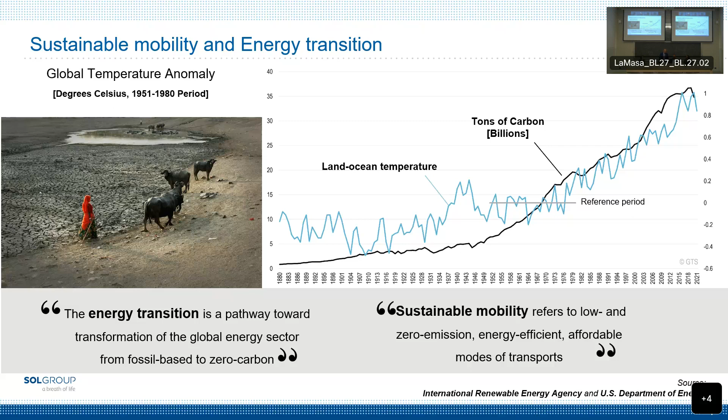So what happened? 50 years have passed, and the result is the one that you can see from this graph. The worldwide temperature is increasing, is rising up, CO2 emission as well, and we are here to talk about energy transition, so how to leave the fossil fuel, and we talk about sustainable mobility. So the question remains the same: can hydrogen help us in this transition? And we are still blocked at that point. No change practically.

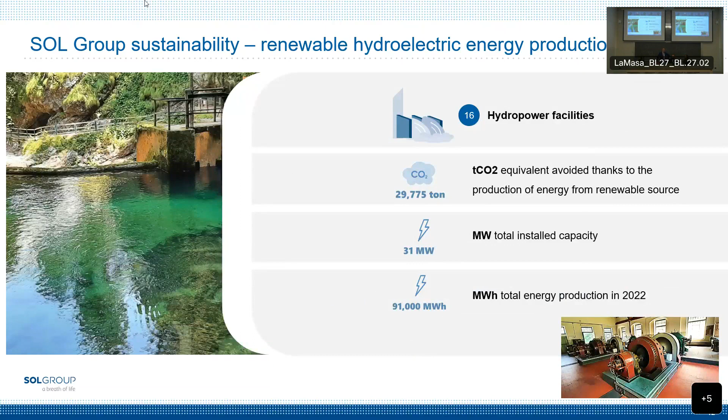What we have done in the years, as I told you, we work in renewable energy, we work for low carbon products and sustainable solutions for our customers. Our history about renewable energy began more than 20 years ago with hydropower plants. We decided to build up or renew very old hydropower plants to supply our production. Then the second step was photovoltaic, and in the last year, even wind farms, connecting again with our production, especially in India. And then we have the PPA, the power purchase agreement.

So we buy renewable energy in order to cover, each year, a higher and higher quota of our consumption. Then we work on biomethane, biogas and biomethane. We began a lot of years ago with plants in order to upgrade the biogas, and we are active in the market of bio-LNG. The bio-LNG is used mainly for trucks, so for heavy mobility, and of course hydrogen.

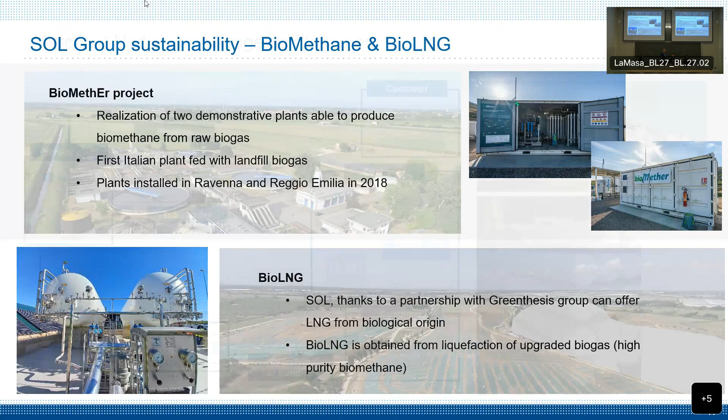What we are presenting here is called merchant. The hydrogen market is divided into two different parts. The main part is the captive, very large production that is used immediately by the consumer, like a refinery, the ammonia producer, and so on. The technical gas company does another job, the merchant, where we distribute the hydrogen.

This is the scheme of our production. There is a main production plant, a pipeline where we deliver hydrogen to the closest customers, and then we have a very developed logistics system to supply and bring the hydrogen to our customers by tube trailer or cylinder. Then there's a third way, called on-site, where we make plants able to produce hydrogen directly at the customer's facilities.

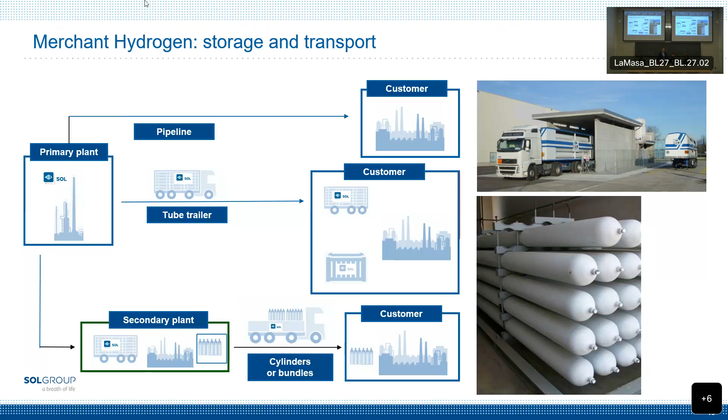Why are we interested in the future development of hydrogen? Because we can play a very important role. The large production will remain the large production - refinery, ammonia, and so on - but the new utilization of hydrogen will need specific logistics, and our companies are specialized in this field.

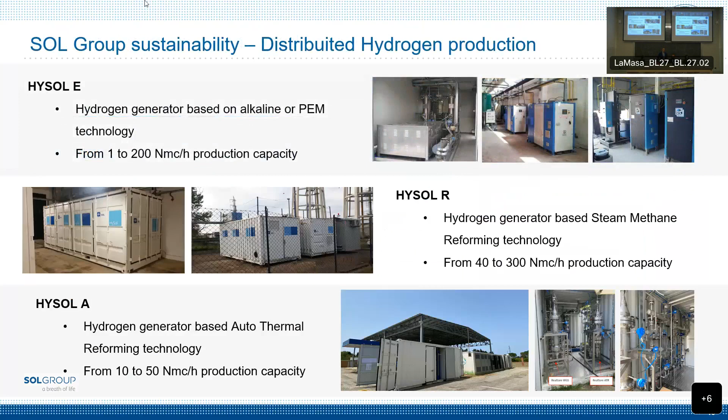Over the years, we have developed different technologies for production, as I told you. The on-site method has the advantage of producing hydrogen directly at the customer's location, and in that case we save all the CO2 emissions that we would have from transport, for example.

Over the years, we have always worked on hydrogen, to develop it as an alternative energy vector. In particular, we began to work on mobility since 2006, where we realized the first hydrogen fuel station. At that time it was 200 bar, and the engine of the vehicles used was completely different. Now today we talk about fuel cell cars, but in that case we were talking about combustion engines.

Then we developed the liquid refuel station in 2008, and in 2015 the upgrading of the fuel station to 350 bar. Now today we are talking about new projects for 700 bar.

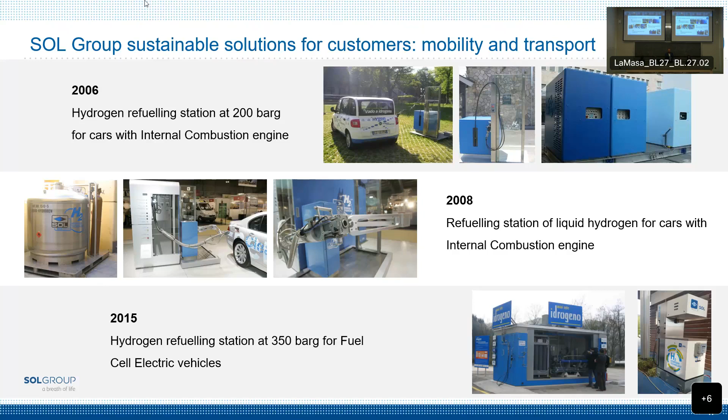Thank you, Alberto, and good evening to all of you. To try to go deeper in detail about the application of hydrogen in different sectors, I think we have to take a step back about CO2 emissions and greenhouse gas emissions.

With this slide, I just put some data that is not updated - it's from 2016, but it's still valid - through which we can understand what sectors are more impactful on CO2 emissions. Looking at this graph, we can see that industry plays a very important role, but also domestic, agriculture, and transportation have a big role in CO2 emissions and climate change on our planet.

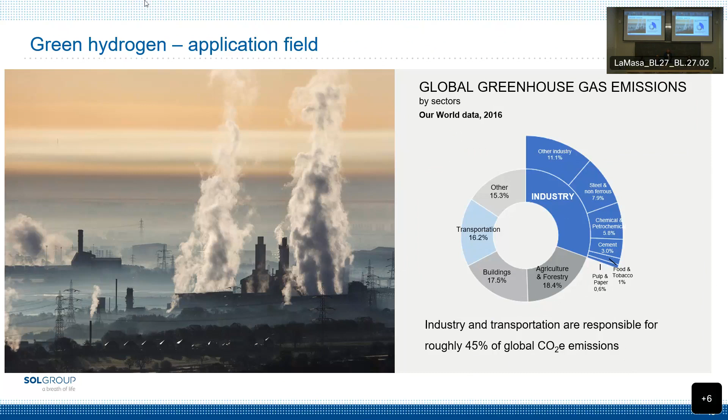So trying to think how we can apply hydrogen to these sectors, I just report a very classical slide about the value chain of hydrogen. At the beginning, there is always the production of hydrogen that, as mentioned before, is not an energy source - it's just an energy carrier. So we need an energy source that must be renewable if we want to avoid CO2 emissions, and we must produce this hydrogen in a green way.

Then we can apply it to a large number of sectors. The easiest and most ready is transport. Probably you already know that there are cars on the market fueled by hydrogen that are available. So you can go to a Toyota shop and buy a Mirai, if you have enough money, obviously. But you can do it.

And for sure, there are buses for public transport running all around cities. For example, I don't know if this is known, but in Milan we have 3 hydrogen buses that have been running through the city since 2015. So there are vehicles that are ready, technically ready, to be a suitable solution to decarbonize transport.

Then we have industry. But 'industry' in general is a term that has no real sense, because there are specific industries that need hydrogen because they have no alternative. In particular, these are all the industries that use fossil fuel to heat up their production process.

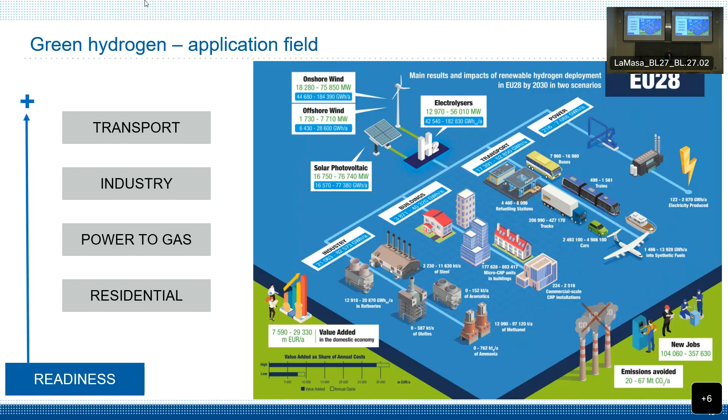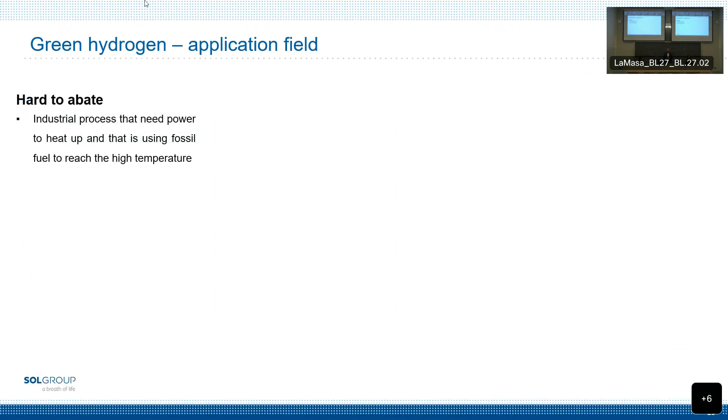We can start with the industry sector, facing the hard-to-abate field of application. Hard-to-abate means industrial processes that need power to heat up their production process. At the moment, they are burning mainly natural gas. Just to mention 3 of them: ceramic production, steel production, and glass production.

In this case, electrification is not possible at all because the temperature of the process is so high that we cannot think to just use a battery or a resistor. We must find a different fuel to run their burner and reach the same production temperature.

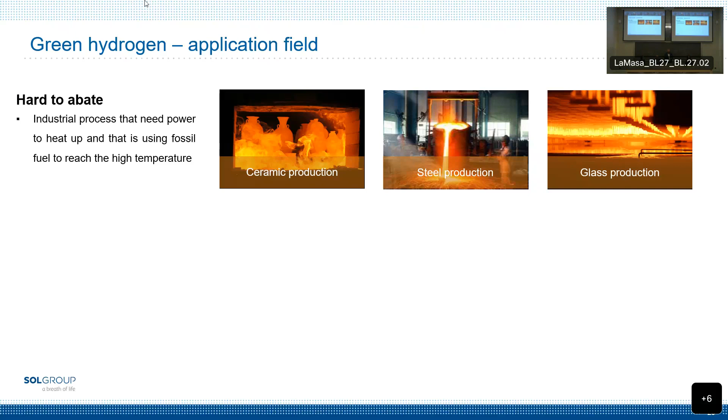On this sector, green hydrogen is actually the only technical alternative that can be put in place. And it's also quite easy to do that because burning hydrogen is really simple. Yes, there are some issues about safety, because the flame speed of hydrogen is higher than natural gas, so there are safety issues connected to the switch from natural gas to hydrogen. But mainly, the same burner used for natural gas can be, with very few modifications, used in order to burn hydrogen.

What is the matter on this field? Why are we not doing that on a large scale? Mainly for one reason: economics, and the characteristics of hydrogen. If you compare the calorific power of hydrogen to natural gas in volume, hydrogen has approximately 30% of the energy content compared to natural gas. This means that to substitute 1 normal cubic meter of natural gas, you must use 3 of hydrogen.

And at the moment, the cost of hydrogen is higher than the cost of natural gas. This means that for large steel production, large glass production, making this change implies a huge increase in production cost that will reflect on the final product cost. So at the moment, the only issue in this field is the cost of hydrogen. That's the reason why Europe, the US, and mainly all developed nations are developing programs to produce low-cost hydrogen on a large scale.

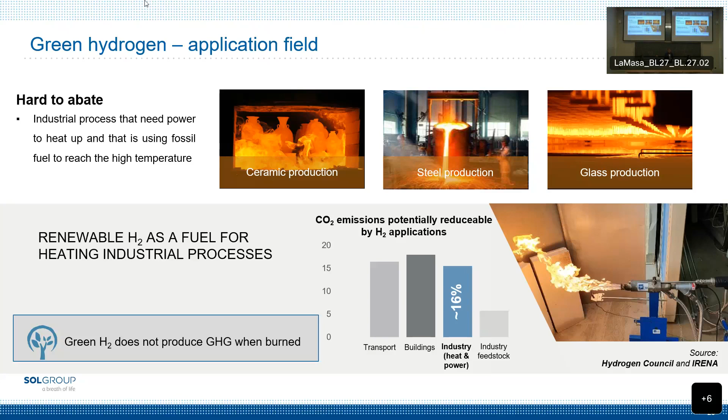Then the second field is transport. The 4 vehicles that are ready to use hydrogen as fuel are obviously cars - as mentioned, you can buy a Toyota Mirai - but also buses, trains, and trucks. About cars, it's quite easy to understand why it's applicable. We must be clear: hydrogen is not the solution for all cars and private mobility. In particular, for small range and city cars, most probably electrification is the most suitable solution. But if we are speaking about long range cars with autonomy of 600 or 700 kilometers, at the moment hydrogen is the only cost-effective alternative compared to battery.

Speaking about buses, in Milan you can see 3 buses fueled by hydrogen, and a lot of buses fueled by electricity with battery. In Milan, the 2 technologies can be competitive. We must say that an electric bus can transport approximately 20% fewer people than a hydrogen bus. Why this? Because the weight of the battery decreases the gross weight that can be carried, and so the number of people that can enter the bus.

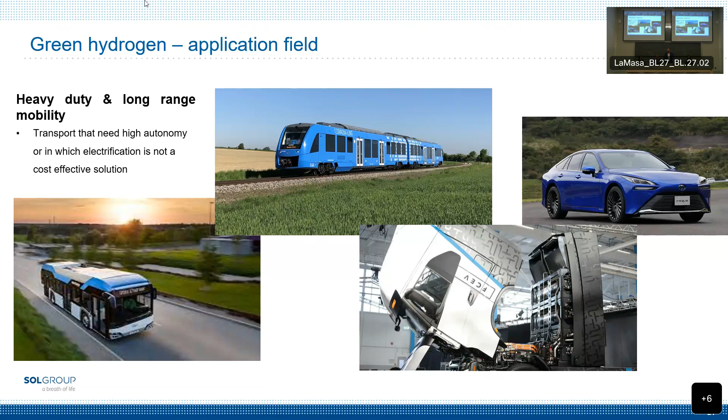I have to be clear, hydrogen train is not an alternative to the electric train. If we are speaking about Italo or Trenitalia with long distance electrified railways, hydrogen is not an alternative. Hydrogen is an alternative on railways that don't have so many passengers and in which it's not cost-effective to electrify the line. For that reason, to decarbonize lines that are at the moment fueled by diesel, hydrogen is the only real choice that can be taken.

Last application that is the key of hydrogen economy, it's the power to gas. The main aim of each government, of each society, is to increase the amount of renewable energy in our grid. This implies a lot of problems in terms of balance of the network and availability of power. In particular, if we are thinking about photovoltaic, you know, photovoltaic produces energy just during the day, but a lot of consumption of energy happens during the night.

Then you cannot think of a society that runs and produces stuff only when there is sun or wind. So the network manager has to implement a system to balance and compensate this fluctuation. And hydrogen is a very easy way to convert electricity into hydrogen, obviously, and then obtain back electricity. From the engineering point of view, it's not efficient, obviously, but compared to the fact that the alternative is a battery that has a lot of material not available in Europe and a very high cost, hydrogen, even if the yield is not so high, is a very suitable solution.

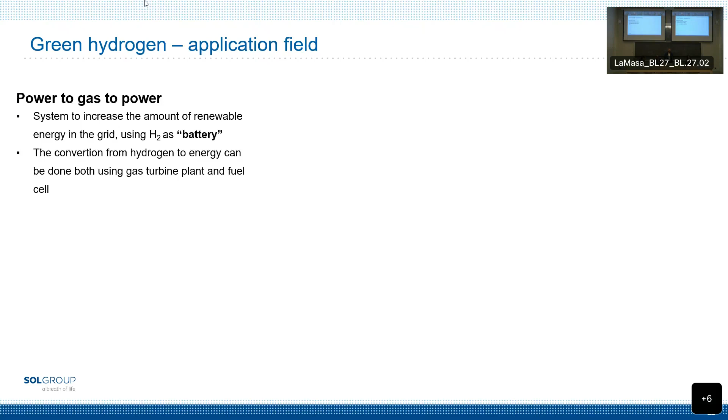And then in particular, there is another aspect of hydrogen that is very important in this field, that is that we can burn it in a turbine exactly as we are doing for natural gas. And for that reason, I just put this scheme of a project in Canada in which it's not green hydrogen, it's blue. So the hydrogen is produced from natural gas, but there is the carbon capture and storage plant. This hydrogen is stored in liquid form, a very huge amount, and is used as feedstock for final users, but also in a gas turbine to produce the electricity for the society.

And this is a gas turbine that is being realized in Florence at the moment, and it is the first in the world. It's not made by Sol, just to be clear, obviously. We are collaborating with the producer of this turbine, and it is the first gas turbine that will be installed in a plant to produce electricity burning hydrogen.

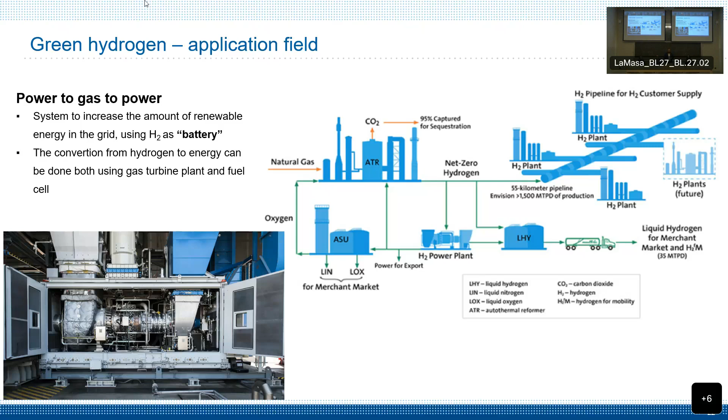Just a mention about the way to produce hydrogen, green hydrogen in particular. If we are speaking about renewable electricity, we must speak about electrolyzers. Electrolyzers can be alkaline, a very old technology. Let me say that Sol installed the first electrolyzer approximately 50 years ago. So a very old and consolidated technology, quite low efficiency, and it uses an alkaline electrolyte that is an issue for the materials of the plant.

The most innovative one is the PEM electrolyzer. I say innovative, but it's another consolidated technology. There are very big plants that use this technology. In this case, we have an increase in efficiency, and there is no liquid electrolyte. This increases the reliability of the plant. The third family of electrolyzer is the anion exchange membrane. It is, let me call it, halfway between alkaline and PEM. It's at a very early stage of development, but it is very promising.

With this slide, I will leave the stage to Elisa, who will speak about the national and regional development of hydrogen.

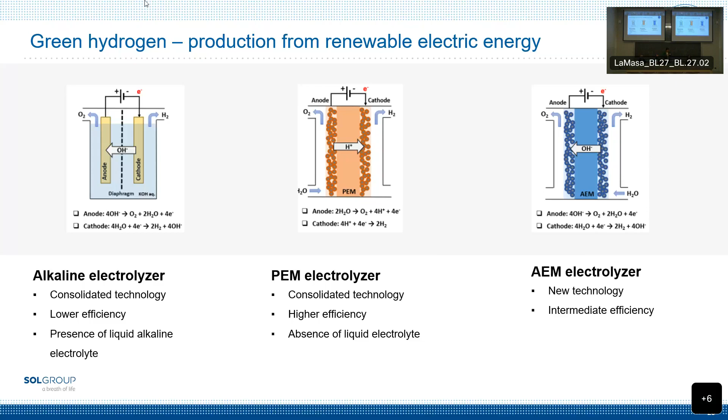So here is my part of the presentation, which is related to the macroeconomic context and forecasting demand for hydrogen in the future. Here I start with the global hydrogen demand, especially related to 3 years, from 2019 to 2021, where we have a global hydrogen demand in megatons per year. In 2021, about 94 million tons, and it is especially divided into the refining and industrial sectors. For refining, approximately 42%, while industry is more or less 60%.

And here we can see that the hydrogen demand is divided also into different countries, among which we can recognize Europe, where the hydrogen demand is approximately 8.5 million tons. The sectors we are considering are refining, ammonia production and methanol production, and industry, especially the oil and gas industry, the chemical industry, and the metallurgical industries. Then in 2021, we can merely see a part related to the heavy industrial sector, the transportation sector, power generation, and the residential sector, a really small part that is more or less 0.04%.

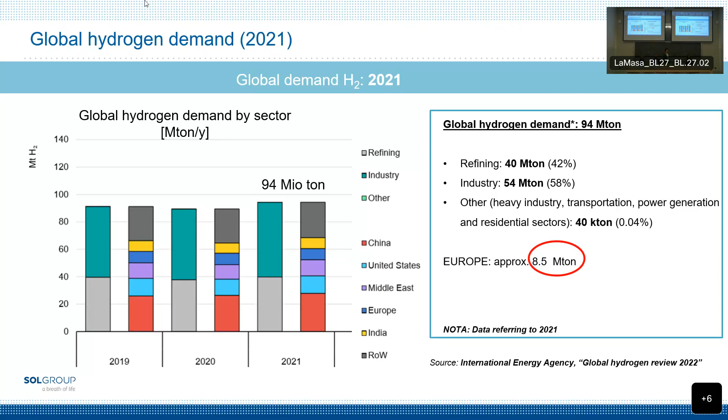Speaking about Europe, we can see the hydrogen demand in Europe, especially in 2020, where we can see again the hydrogen demand in kilotons, divided by application. What we can see is that the percentages are basically the same we have described before. More or less 50% is related to refining, while the other percentage is related to ammonia production and methanol production, so basically industrial sectors. And then we have a small part that is related to the energy sector and transportation.

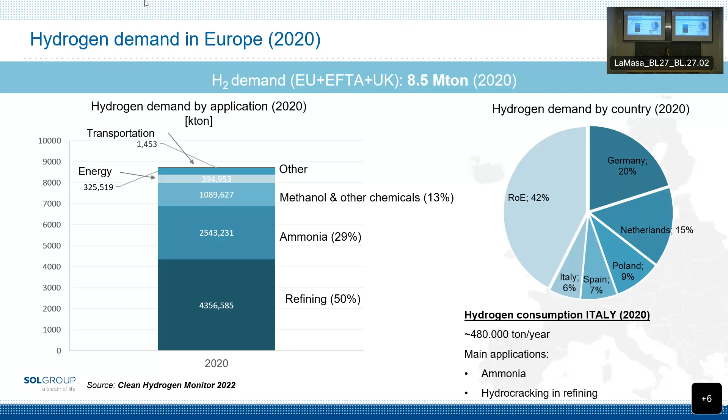On the right-hand side of the slide, we can see the hydrogen demand divided by country. So basically countries within Europe, where we can have a focus on Italy, where the hydrogen consumption is about 6%, so more or less 500,000 tons per year, where the main applications reflect the applications described before, so basically ammonia production and hydrocracking in refining in order to obtain light hydrocarbons.

Here we have a slide that is basically a continuation of the first slide I presented. So we have a focus not only on 2021, but also an outlook to 2030, where we can see two different scenarios, the STEPS scenario and the APS scenario. The first one is the base case, but now we have to deal with the second one, the APS, since it is related to a condition in which all the statements about the transition from gray hydrogen into green hydrogen are taking place.

And so here we can see that the quantity of hydrogen that in 2021 was about 94 million tons will become 130 million tons, with a slight difference with the STEPS scenario, in which we do not consider the sectors that I have announced before, so basically the heavy industrial sector, transportation, power generation, and residential sectors, that with green hydrogen are increasing.

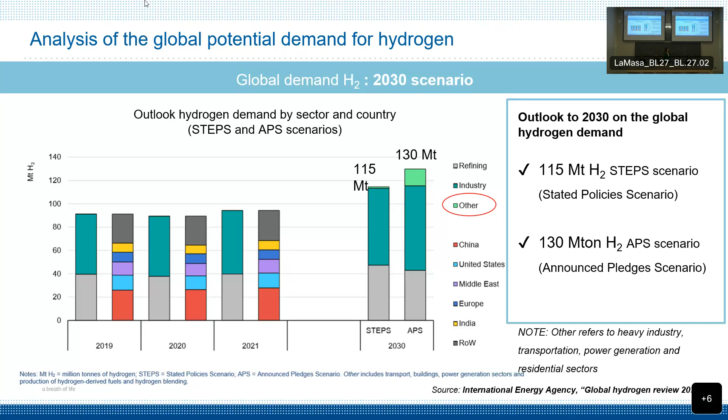Then, talking about Europe, we have to understand the concept of energy transition. Energy transition is the condition in which we describe the passage from energy sources derived from non-renewable energies, for example fossil fuels like coal or oil, to renewable energies. And this is feasible with Next Generation EU, and in particular with the Green Deal.

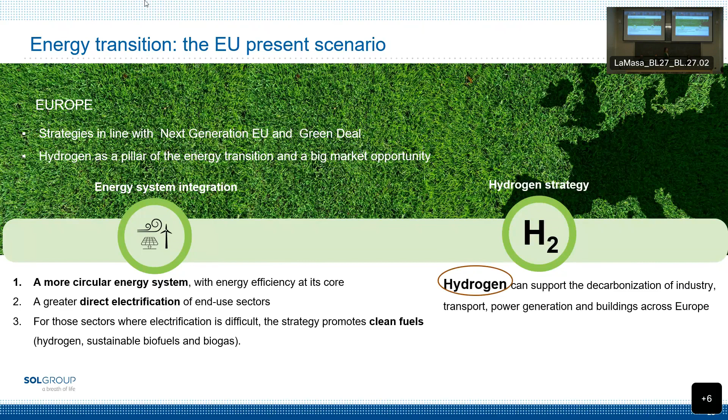So the aim is to reach in 2050 24% of the final energy demand with hydrogen, seeing that the potential hydrogen demand will be approximately 7 times the existing industry feedstock that we have today. The most important sectors of hydrogen demand in 2050 will be power generation, transportation, the residential sector, industry energy, and new industry feedstock, where for industry energy we consider the transition from gray hydrogen into green hydrogen, while new industry feedstock is where we consider the direct reduction of iron with hydrogen instead of carbon.

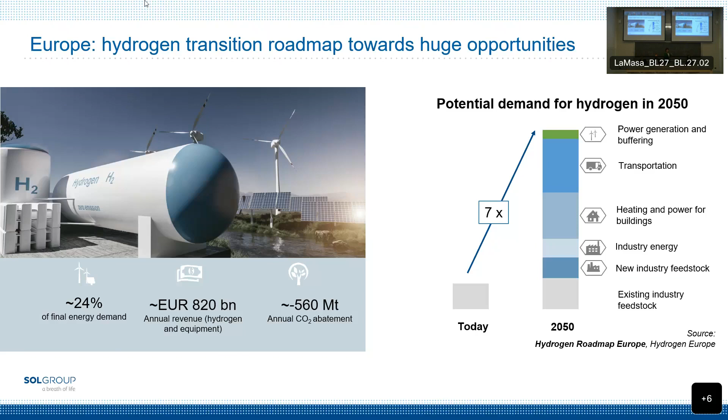Here there is a focus on the state of the art of national hydrogen strategies. On the right-hand side of the slide, there is a map in which we can evaluate in which countries the national strategies are already published and in which countries they are in preparation. We made a focus on 4 different countries, among which there is India, where the plan is to achieve neutrality in 2070, especially based on green hydrogen. Then there is the United States of America, where the national clean hydrogen strategy is still a draft, but the idea is to consider 50 million metric tons per year of clean hydrogen by 2050.

Then there is China, where we have a plan for the medium-long term for investment in the hydrogen market. And in the short term, the goal is to produce 200 kilotons of hydrogen by 2025. And at last we have Japan, where there is already a strategy called the Basic Hydrogen Strategy from 2017, that underwent a change in 2021, since before the goal was to produce 2 million tons per year by 2030, while now the goal is to produce 3 million tons per year in 2030 in order to reach 20 million tons per year by 2050.

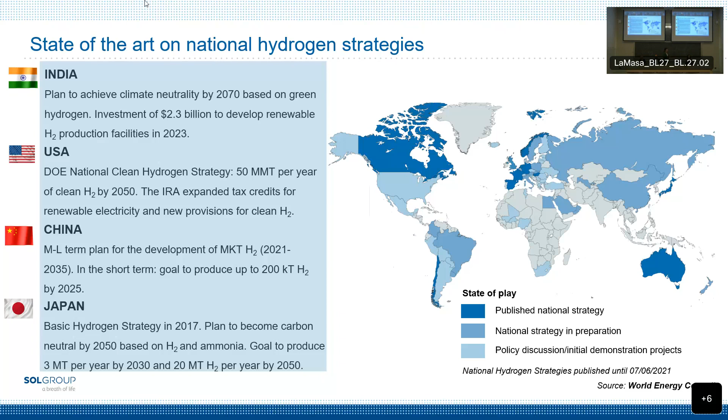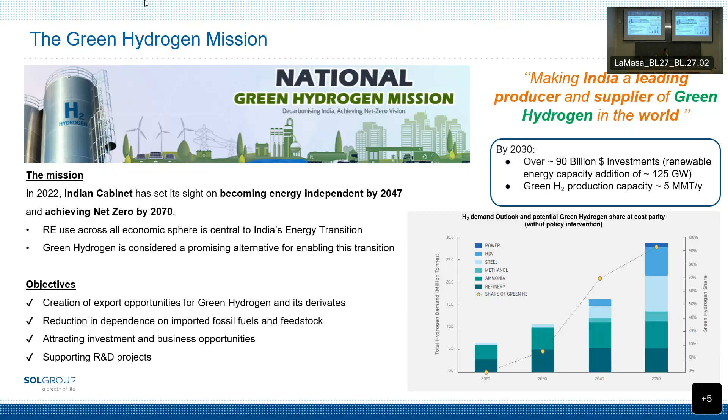The second step that I have just presented has been subjected to a change with the REPowerEU plan in 2022, since the capacity of electrolyzers installed was 40 gigawatt with the plan described before, while now it is 65 gigawatt by 2030. And in particular, the amount of million tons of hydrogen that has to be produced will be doubled. In particular, we have the 10 million tons of internal renewable hydrogen production and also 10 million tons of imported renewable hydrogen by 2030.

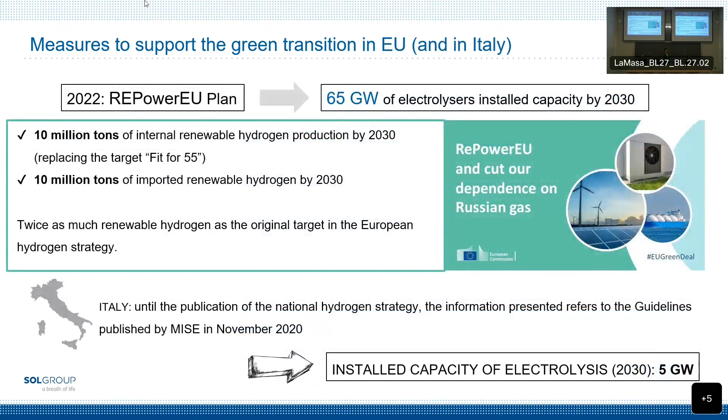In particular, Italy has not yet a national hydrogen strategy, but what we can read is within a guideline that was published in November 2020, and the installed capacity of electrolysis that was set is about 5 gigawatt by 2030. So there are measures in order to support the transition in Italy about the promotion of the production, distribution, and also the use of hydrogen that are present and are the goals within the National Recovery and Resilience Plan, that is basically divided into mission components, types, and intervention, where there are 2 different types in order to develop structures for the hydrogen production that are basically reforms and investments.

Reforms are more related to legislative aspects, while investments are in order to develop the real structures for hydrogen. In particular, investments are divided into different interventions that are basically the ones already described by my colleague Mauro. So basically the manufacturing in abandoned industrial areas, an intervention that expired in February 2023. Then we have also the use in hard-to-abate sectors, the hydrogen filling stations for both road transportation and rail transportation. Then at last, we have also an investment that is more related to university sectors, so the research and development of hydrogen.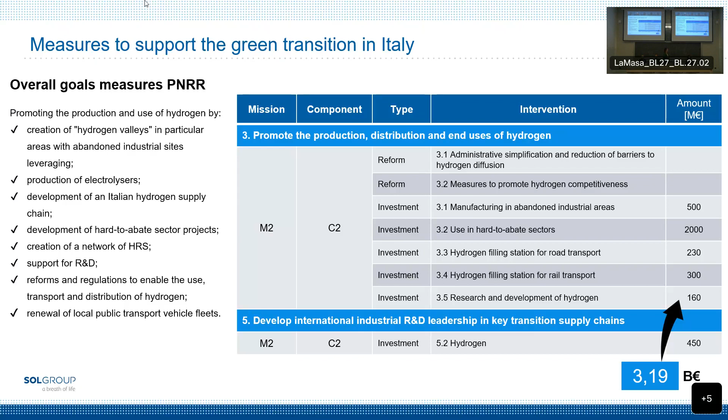Now I leave again the stage to Mauro.

As the end of the presentation, I would like just to talk about one specific part of the development of hydrogen. As mentioned, a lot of times you can buy a Toyota Mirai, but you can't refill it because at the moment the hydrogen refilling stations are just a few. So the first action that Italy put in place was using the PNRR program to finance the realization of hydrogen refilling stations

within the nation. The situation in 2023 was just 6 hydrogen refilling stations in Italy, and with that action, Italy is going to realize 35 brand new hydrogen refilling stations. And one of the 6 that are installed at the moment has been realized by SOL. I'll just spend a few words about this hydrogen refilling station that has been realized in Capo d'Orlando.

First of all, because I was involved in the project, so I'm quite proud of it. And because there is the competitor. Exactly.

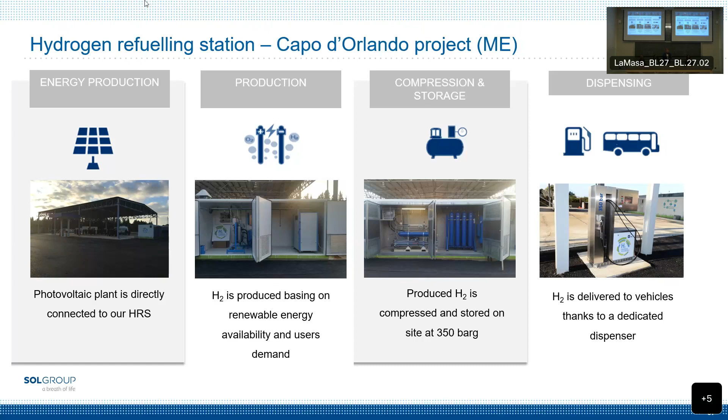In particular, we realized the electrolyzer, so the production on site, the hydrogen storage, the compressor to realize the refilling of hydrogen and the storage of hydrogen, and also the dispenser. But if you think about this hydrogen refilling station in a smart grid, you can think that you have the renewable energy that can be used directly to produce hydrogen when there is the excess of renewable electricity.

The other way of using that electricity is electric mobility, but hydrogen, once it has been produced, can be integrated by additional hydrogen produced from biomass, biomethane or biogas, and used both to fuel fuel cell electric vehicles, but also a fuel cell to compensate the lack of renewable electricity. So this scheme is a very small realization. It's like a pilot plant, a prototype, but it has different bricks that create a system that is an example of how hydrogen can be integrated in a smart grid and in our society.

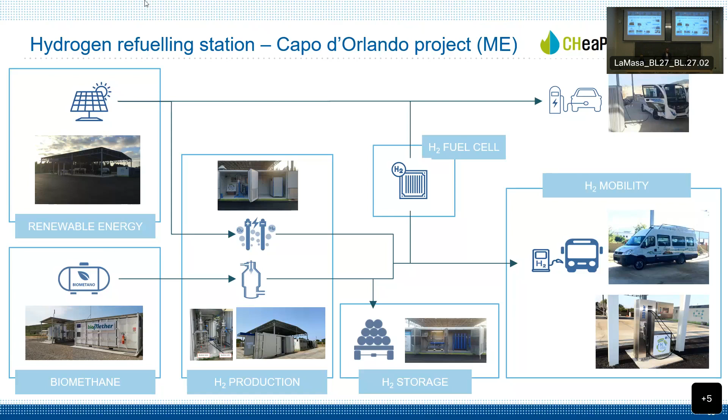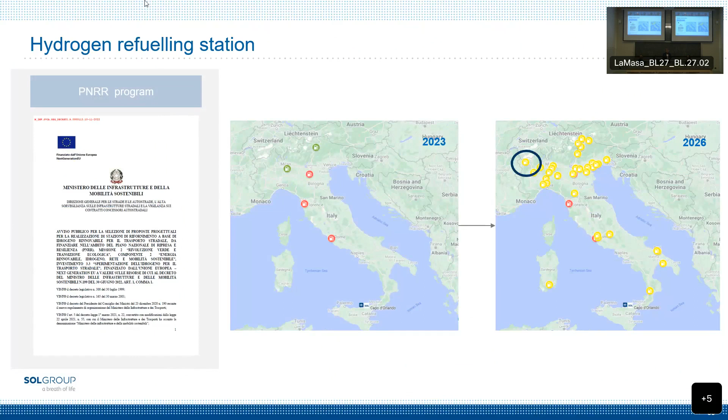The second hydrogen refilling station I will mention is the one that we will realize using the PNRR program, in particular one of the 35 that have been selected as suitable for financing, and it is our project in Aosta. Aosta, you know, is in the mountains, and they had the need to decarbonize their public transport, and they tried to study the experience of Bolzano, another site in which there is an active hydrogen filling station.

And decarbonizing the public transport in the mountains through electric vehicles is not possible, mainly for 2 reasons. The geographical conformation of the territory, with the slope that increases the consumption of electricity in electric buses, but also the temperature. Since it is mountains, during winter it's pretty cold, obviously, and the storage capacity of the battery decreases a lot. So the autonomy of an electric bus in the mountains decreases approximately 40% compared to the declared autonomy. For that reason, electric buses in the mountains are not a good idea.

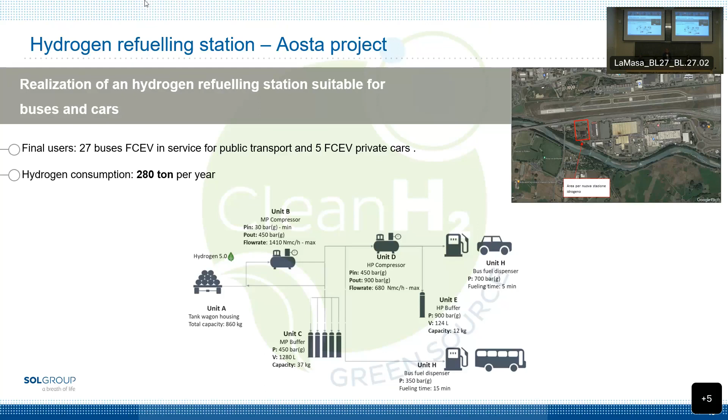And for that reason, Aosta chose to buy 27 fuel cell electric vehicles, and we defined with them the project to realize our hydrogen refilling station. The hydrogen refilling station is supposed to supply up to 280 tons per year of hydrogen. That is enough for the buses and additional cars for private people that will have enough money to buy a Toyota. The project will be realized with the region itself, and the company owned by the region that will produce

the green hydrogen. Our plant will be composed of a compressor to make the first step of compression from 30 bar to 450. That is the part of the hydrogen refilling station suitable for the buses. This hydrogen at 450 bar will be stored in a stationary storage system composed of cylinders. And then we have the second step of compression to reach 700 bar. Actually, it will reach 900 bar in order to have enough pressure difference to perform the refilling of cars at 700 bar. Even in this case, we have a very small storage unit at 900 bar and the dispenser unit to refill both cars and buses.

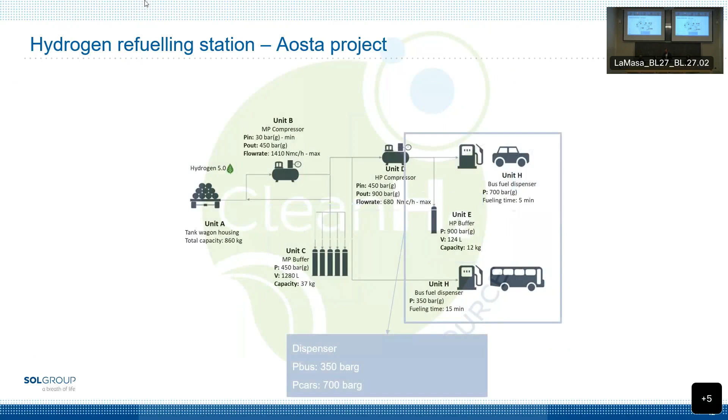With this, we have ended our presentation, but I guess it is quite interesting to see your answers to the initial question. So before going to the conclusion of the presentation, in the time that Mauro shows us the answers,

let me say thank you to Elisa and Mauro for the presentation they prepared in one night, as we can do. And again, to Elisa for the invitation and for the passion that she put in this topic. I live close to Elisa, and we have a lot of discussions about hydrogen.

Okay, so I don't know if you have some questions, but before going to the questions, I would like to see the results. And I don't see them.

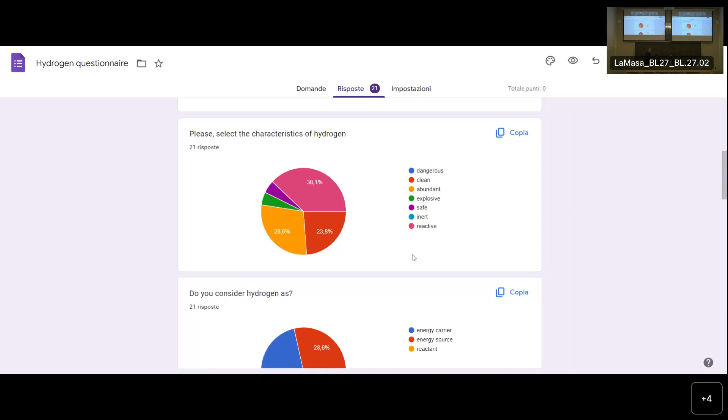So, select the characteristic of hydrogen, and the main answer was reactive, and then abundant. So it's clear. It is nice that a lot of people say clean, but just a few people say it's safe. So this is really interesting. This is a really interesting point of view, and this is one of the main issues that we face when we talk about hydrogen.

It's true, it's reactive, it's explosive, and so on, but with the right expertise it can be treated. So I told you that we have a well-developed logistic. All the technical gas companies travel with trucks bringing hydrogen normally during the days, and normally we didn't hear about accidents with hydrogen. Trailers travel with 200 bar of hydrogen normally, and it is safe. So it's clear that it is mandatory to have the right expertise.

We work on several working groups with the fire brigade, for example, and we discuss the comparison between hydrogen vehicles and electrical vehicles. And they are afraid as well about the electrical vehicles, because trying to put out a fire on an electrical vehicle is really, really complicated.

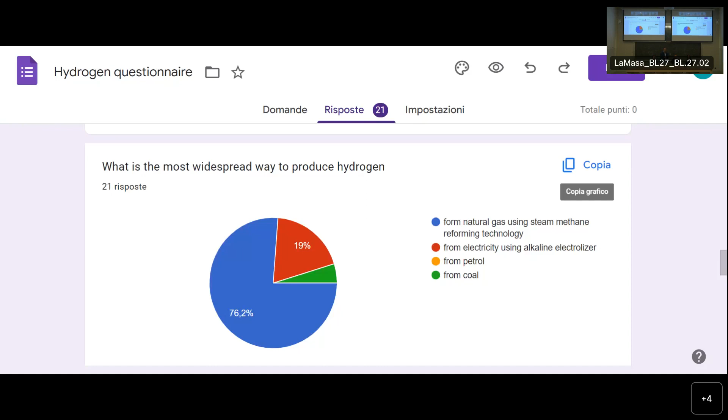And unfortunately, we don't use electrolyzers because it is really expensive, taking into consideration that you need more than 5 kilowatt-hours per normal cubic meter of hydrogen produced. And that's the reason why we are not using hydrogen in a large way.

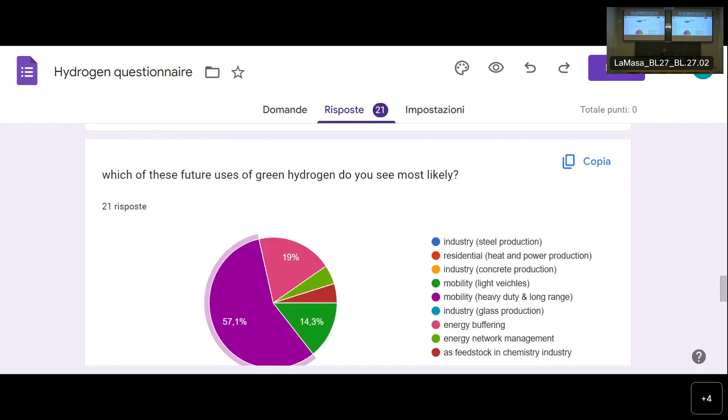Which of these future uses of green hydrogen do you see as most likely? So the main one is mobility for heavy duty, and that's a good answer. And then we have energy buffering, energy network.

As I told you, we will not have a new oil, so we must be able to use the right carrier in the right way, the best way. Hydrogen is not the solution for everything, but there are some sectors where it's most useful. Mauro told us about train, plane, we talked about even shipment, even if in another form.

I think it will be most effective in those sectors compared with cars. Every one of us can see that the development of mobility in the city is electricity, and it's clear that's the reason. For energy buffering, we must use hydrogen even if it's not so performing.

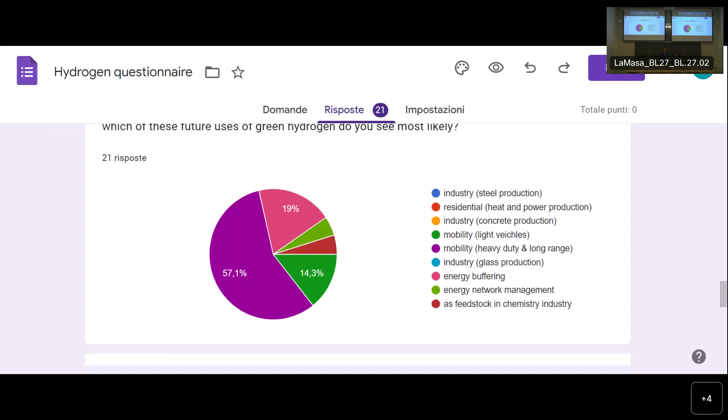So it's not the best way, but if I don't have any alternative, we're going to use it even to produce energy again. The trick is to storage the energy as much as we can and then use it in the best way. If I can use hydrogen as hydrogen for mobility, for chemistry, for feedstock, it's perfect. If I don't have any alternative, I can use it to balance the energy. I trust that one of the larger uses in the future will be for feedstock, in order to produce green ammonia for sure.

What will be the most widespread way to produce hydrogen in the future? From renewable energy, of course, sure. In a future where all the energy produced will be renewable, most of this energy will not be programmable, and so we have to find a way to storage it.

As I told you, and as Mauro told you, if you consider that to substitute a cubic of methane we need roughly 3 cubic of hydrogen, and roughly a cubic of hydrogen is 3 times a cubic of natural gas, or it was before the war, it's clear that we need a very economic power source. The only economic power source we can have is renewable energy when we have to waste it. So if I don't have the possibility to use that energy, I can take it for free, or something like that, and produce very low price hydrogen.

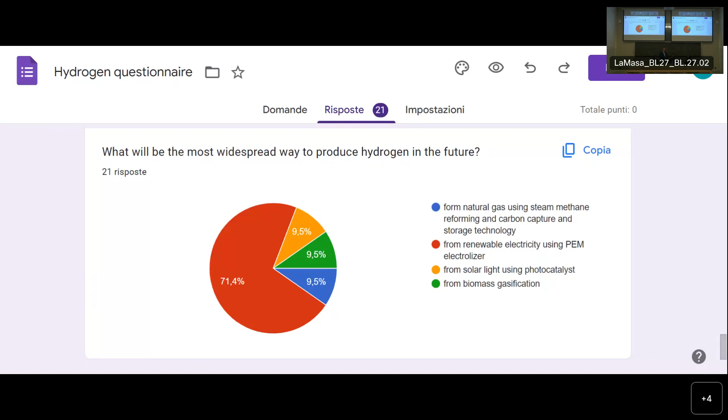There's a question: you mentioned that if you want to substitute hydrogen for natural gas in industry or power plants, we need about more than 3 times. Why is the LHV of hydrogen around one third of the LHV of natural gas? The LHV of hydrogen is 120, and the LHV of natural gas, base case, is around 50. If you use natural gas to heat up, and compare the power you can take from a cubic of natural gas versus a cubic of hydrogen, in order to replace natural gas you need 3 times the volume of hydrogen.

Let's talk about cost before the war, because the war completely changed the cost of electric energy and natural gas. But at that time, we had roughly a ratio of 1 to 3 on the cost per cubic. So before the war, in order to have the same quantity of heat with hydrogen, you had to pay almost 10 times more. So that's the difficulty.